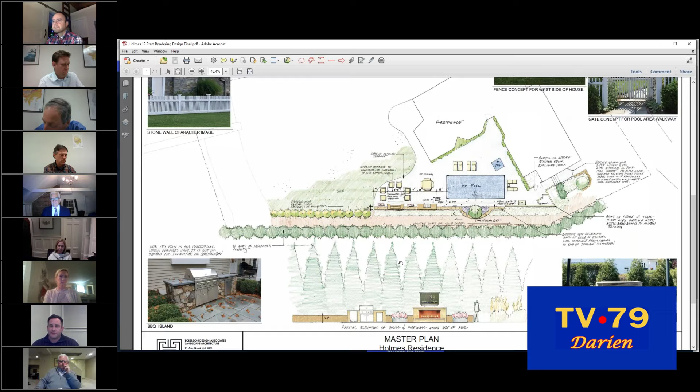So what we're proposing is a very simple application, basically a small extension of the existing patio. Here's the existing pool. There is a massive screening of tall evergreens between the adjacent neighbor and our client. What's being proposed is a very small, about 1'9" seating wall with a built-in grill, and a TV/fireplace wall where the TV can rise and lower out of the back, as seen in this picture. The wall itself for the TV and fireplace is about 3'10". The TV that comes out of it, if it's a 52-inch TV, is only about 2 feet tall, so with the TV and the wall it's not going to exceed 6 feet tall. The wall is located 8.5 feet off the property line, which is required to be 8 feet for the patio, so it complies with the setbacks. It is not a structure.

We have the TV and fire and everything facing away from the neighbor. It's facing towards my client's house. If my client really wanted to, he could put the TV on the side of the wall or side of the house and face it towards the neighbor. He hasn't done that. Everything, all the sound, all the light, all the noise is projecting away from the neighbor that shares a common property line.

As far as in response to DEP, yes, it's a stone wall, so it's going to have a footing, so it will be anchored. And understandably, if it does get flooded, that flood insurance would not cover that. That's completely understandable.

Again, thank you for having this special hearing tonight. That's really all our presentation is, because it's such a simple project. If you have any questions, I'm here to answer them.

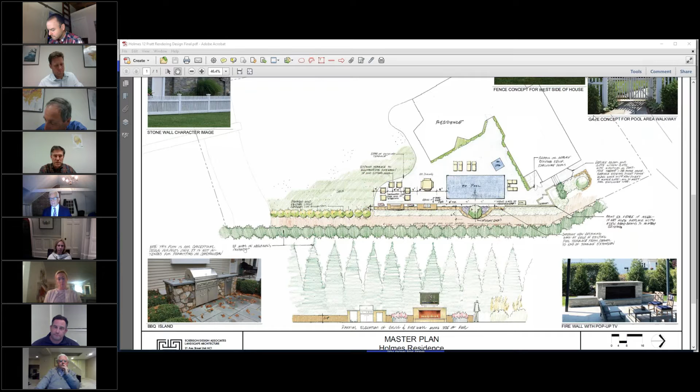Great, thank you, Rob. My first question is that one element that's in the middle, it looks like a table. I can't see what it's called in the middle. This here? No, next to it. That's a great, it's a square. Looks like a table, a wooden table. Oh, this here. Yes, yes. You got it. There's a table there now. They have a table here. They've got chairs. There's a standalone grill.

You know, really what we're just doing is making it nicer and a little more high end. Right, I got you. So my question is, on Google Maps you can see that table sitting there right now. From where the fire pit, from where the built-in grill starts to the end of the new wall, how many feet is that? What's the length of this whole thing? 14 plus 9, about 23 feet. It's only about 167 square feet of patio being added.

It's not very much. No, I'm starting with the wall. So the wall is 14 feet long. Is that what you said, or 28 feet long? Well, we're 7 feet from the grill to the firewall. Then it's about 8'6" that firewall, and then it's 7 feet to the end of the wall. So that's 14 plus, I think, let's call it 9 feet. So 23 feet. Okay, and does the wall start at the edge of the pool?

Because in Google Maps, you can't see the wall there. So the wall is starting at the edge of the existing patio. This patio is there, and that's just it. Basically, the wall is going to go on the edge of it.

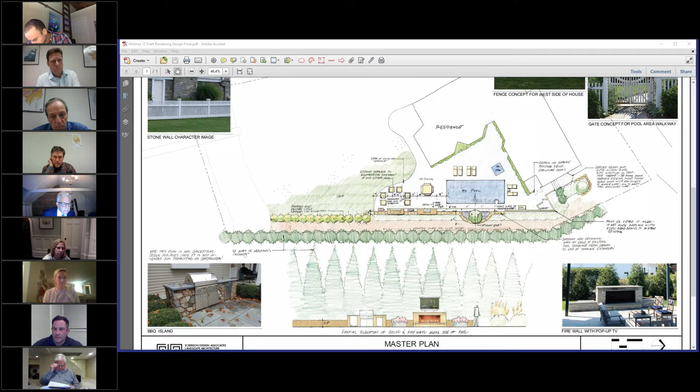Can you pull up that map again, Rob? I think it says from shower to end of existing. So is there a shower there on the property line? Way in the corner, there's a shower, that's the corner, Kara. Can you blow that up, Rob? Yeah, blow it up a little bit more. One more click. I got it, yeah, then shift it over. Now you got to slide it up a little bit. There you go, a little bit more. There you go, bingo. See that box at the bottom?

It says, just read that box to me. It says construct new retaining wall at edge of existing pool terrace from shower to end of terrace extension. Okay, now where's the shower? So here's the shower, that's an existing shower. Okay, so then to here is about where it's retaining. Once we get to here, it's at grade, existing. Because what's happening is we've got a little bit of a swale in here, and there's built up debris and stuff in here, so there's going to be a little bit of a drop. That's why we got the spot elevations out there. So in this case, it's a little retaining, but it's only about 3 feet. By the time we get to the grill and this area, it's no longer a retaining wall, it's at grade, so it's just a freestanding wall.

I got you, my question just was how many feet's the overall thing. What's that one box that's between where you are now and the shower? Oh, this area here? No, over - go from... no, there's a box going over the other way. Right there, that box, what's that thing say? STR, I don't know, can't read the handwriting. I mean, I think that's just like a table or something that's there. Probably just storage - STR, storage. So it's a box for storage, you can put stuff in there.

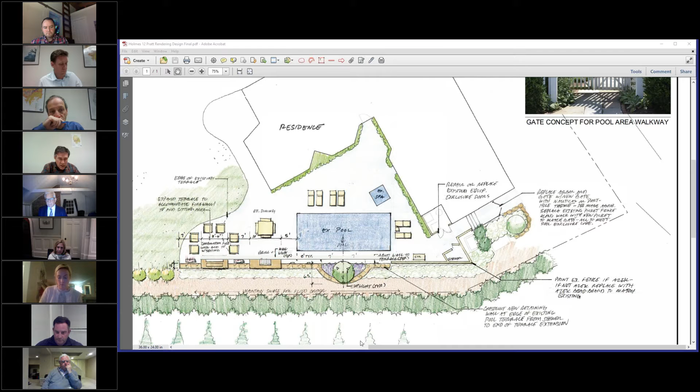Okay, and if you slide the thing down, Rob, you can see the height of the wall on the bottom scale. Hold on, my computer didn't like AutoCAD and GoToMeeting going on at the same time, so I had to turn that off. I'm amazed my computer doesn't melt down with all the graphics. Keep going—right there, see right there, there's a dimension next to the fridge. Keep up, that's it—1 foot 9 inches. Okay, that's how high that little seat wall is. And this is about 2 feet, 30.

So to me, their depth and width is the same exact thing, correct? Well, yeah, I just want to make sure I'm on the same page—front to back is depth in my mind. That's 30 inches for both of these structures that Rob is pointing out. And then the sitting wall is 18 inches high, 18 inches deep, and 21 inches—12 feet, I'm sorry, plus. So it's 18 inches deep, 21 inches high. That makes it a nice seating wall, which is fine, and my clients have no objection to it.

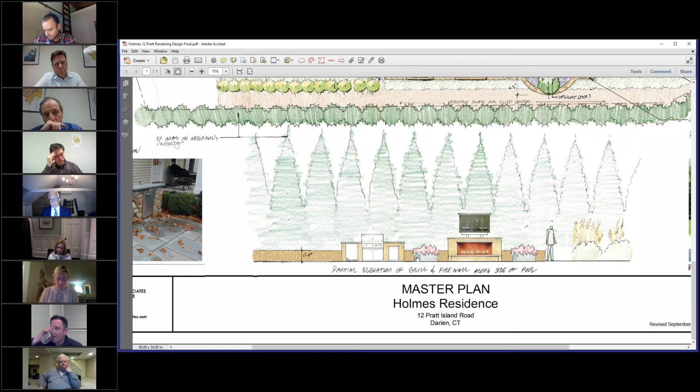And Kara, in response to your question, it is my understanding that David Keating has approved built-in kitchens as a wall and allowed them to be at the edge of terraces, 8 feet away from properties, in the past. So we are not challenging that. But when I talked to Dave about this particular application, he did not advise me that he approved anything but a kitchen. And I think this one is pushing the boundaries, because what you've got now is a fire pit that's not a pit down by the ground, but an elevated structure that's 4 feet tall. And that's this one.

And then it has a TV that pops out that gets it to 6 feet tall. And what's to prevent you—is that appropriate? And I think that's a structure.

It creates noise, light, and it's going to encourage people to congregate outside at night. My clients' kids' bedrooms are right adjacent to where this terrace is. They're 25 feet away. And now there is some screening, but the fact is that with an outdoor 24-hour TV, you're going to have Monday night football games going on till 11 o'clock outside in the warmer weather.

And the applicants already have the ability to move a TV outside if they want and put it back in, and we couldn't stop that. But the likelihood of that being year round, which this is, and it's just so much easier—this is really a structure in our view. And there's plenty of room on the property for them to put it elsewhere.

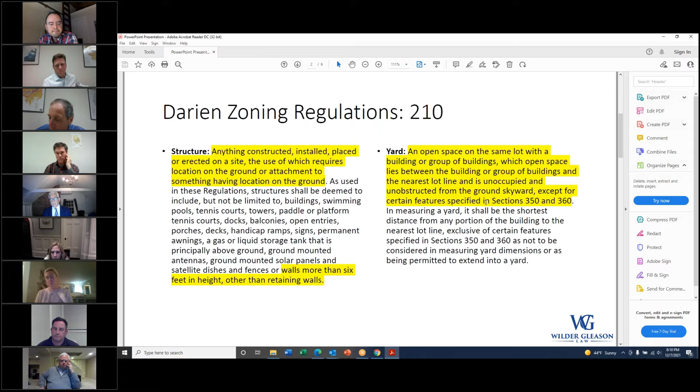So then the question is this structure—and we're not objecting to the kitchen because that's a ZEO interpretation already, and we're willing to accept that, but we don't want the fire pit and the TV coming out of it.

And so if you look at 361, it defines terraces, allowing a terrace shall not be considered in the determination of yards. It shall be unroofed and without walls or parapets or other forms of enclosure. Well, this is a form of enclosure, slightly. I mean, and also you're allowed to have an open guard railing, not over 3 feet high, adjacent to your terrace.

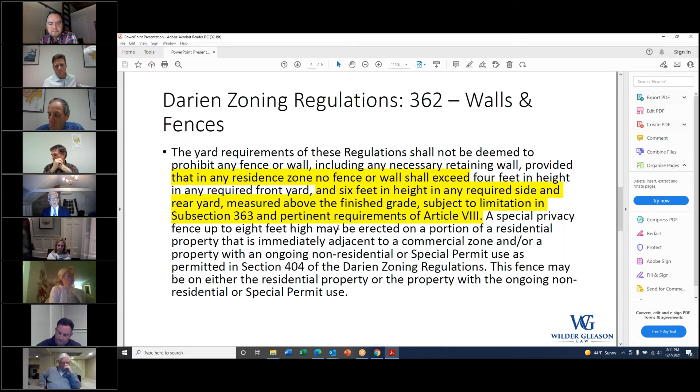This is a 4-foot wall that they're proposing, this fire pit. It's not an open guard railing. So I don't think your regulations allow this. The yard space is supposed to be open, and it's 25 feet here. You have a 40-foot rear yard.

And looking at the plan itself, which I'm going to blow up, because when you look at it, they could move this 25 feet away and put it back here. And we would have nothing to say about it. And we think that's appropriate.

To allow this to happen now, it's going to be the slippery slope. We are okay with kitchens, and I think the ZEO has approved that. But beyond that, you're entering slippery slope territory. Calling anything that's 30 inches deep, 4 feet high, and 8, 10, or 6 feet wide, whatever it is, a wall, and allowing a series of these to occur is only going to intensify the use adjacent to the property, which is contemplated by your regulations as being not permanent structures.

These are permanent structures. They're fixed to the ground. They're attached to the ground. They interfere with the open yard that is required. And this property is already challenged because it's in a 1 acre zone. It's a half acre.

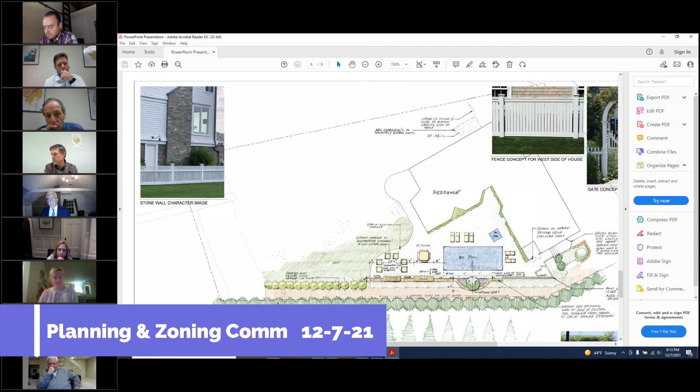The pool itself is there by a variance granted back in the 80s. And it was, in retrospect, almost improvident that it was granted, because exactly what's happening now is a consequence of the fact that the pool's there instead of back where it should be in compliance. And the tendency is to have everything around the pool, which puts all the activity adjacent to my client's property.

And interfering with his quiet enjoyment of his property. You're exacerbating that situation if you approve this TV and fire pit. I believe your regulations do not allow you to do that because this is a structure. It is affixed to the ground and it interferes with the open space between the property line and the 25-foot setback here.

And it has a negative impact. The kitchen is an area that's used for an hour or two and then it goes quiet. It's unusual for you to be doing that late at night. This fire pit and TV is going to be used late at night, and it's got kids' bedrooms right next to it, and it's not appropriate in our view.

I just want to ask one more question. Of course you can, sorry. So in looking at...

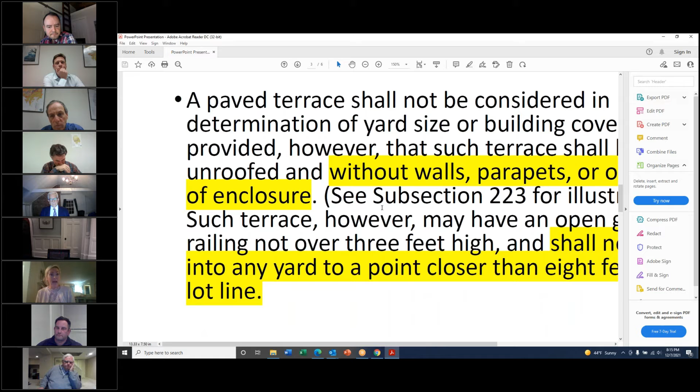From the plans, it appears at the planting area, which I believe is the retaining wall section, or maybe not — it's hard to tell because of the size of the font and writing, it's hard for me to see it all. But I think you said, Mr. Frangione, that was 2.9 feet. So does that extend the terrace, or is that wall not considered part of the terrace? Is that a different wall?

They're different walls. Yes, they may look connected, but by the time it gets over to the fire pit, it's no longer a retaining wall — it's a stone wall. From the perspective of the neighbor, it's a stone wall.

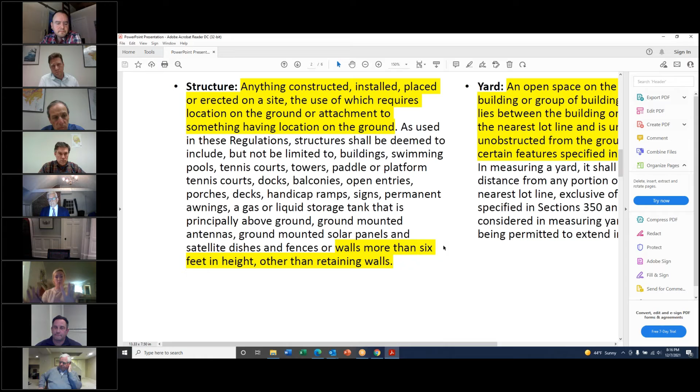But are walls that are less than 6 feet tall considered terraces? Is that not considered enclosing the terrace or the patio? No, and I was going to say in my comments, it's not a form of enclosure — if something's open on 3 sides, it's not enclosed. It's just a divider, no different than, in theory, putting a Jersey barrier there. It doesn't enclose it, it's just a fancy looking freestanding wall.

Is there a fence around the pool or property? There is a pool fence. I know that's required by code. Right, so where's... I know the fence, if I remember correctly, extends out all the way to the water, basically along the row of trees, because I did walk down there and I saw where the fence ends at the seawall.

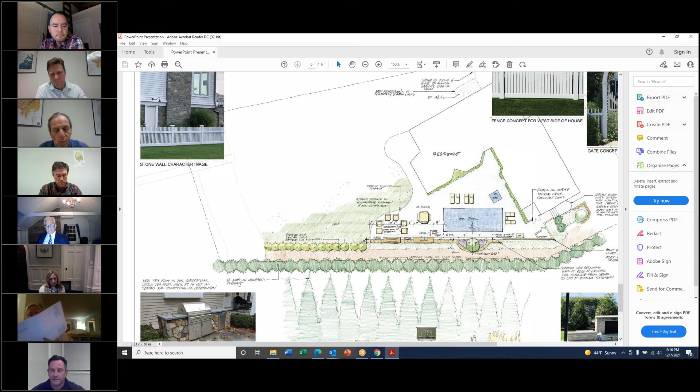Can I ask a question? Who's that? Adam? That's Adam. Go ahead, sir. Yeah, I've got a question.

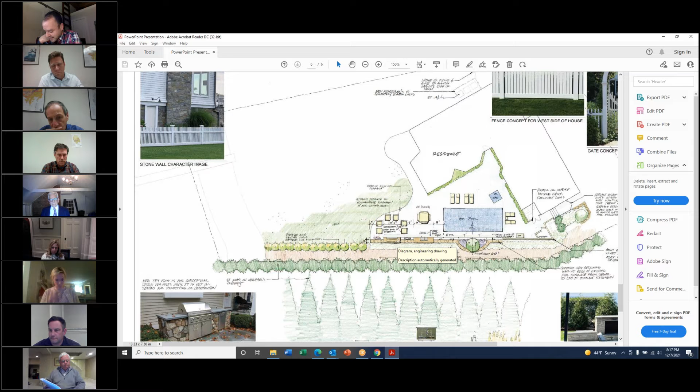You mentioned, just as it relates to the fire pit, the wall itself is going to be about 3 feet 10 inches, call it 4 feet, and the TV itself is going to be about 2 feet. But looking at the diagram underneath it, there's obviously some enclosure the TV has to sit in. So it's not just the top of the wall plus the TV mounted flush to it, right? It looks like there's some open space underneath it, and the TV's got to be protected from the elements somewhat. How big is that enclosure? Is that an extra foot, an extra 6 inches?

I don't know the answer to that, but we're kind of splitting hairs here. The freestanding wall is about 3'10". If I put a planter on it that's 36 inches tall, that doesn't all of a sudden make my wall 7 feet tall. If I take a freestanding TV and plop it on top of the wall, that doesn't make the wall... But is this a freestanding TV? No, it's a TV that can come in and out of the wall, so it would be part of the structure, part of the wall — unlike a planter, which is removable and not secured.

Okay, and a freestanding TV is not secured either. You could lag bolt it. I could take a TV stand and secure it to the wall. I'm just asking you based on that. It's no longer really semantics here.

No, a freestanding TV is not secured, and this is part of the structure and rises up. So it's one thing. So now, to my point, if I take a TV and I lag bolt it to the top of a wall, is that now a 7-foot wall? No, it's a wall with a TV on it. In this case, we have a wall that 98% of the time is just going to be a wall.

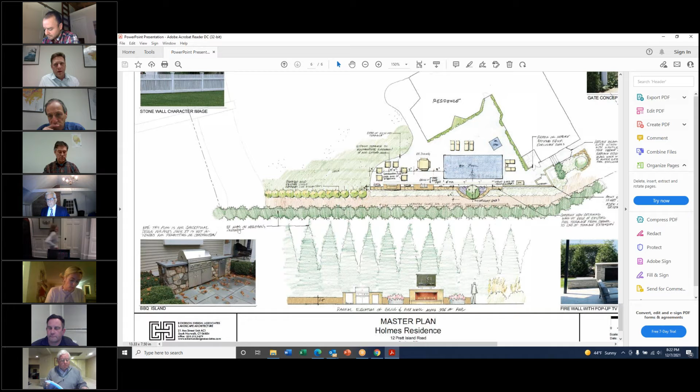And just very quickly, a fence is defined as a barrier of any material or combination of materials erected to enclose, separate, screen, or buffer areas of land. So I think that's an important distinction to make as the commission considers the difference between what might be interpreted as a wall versus what might be interpreted as a structure on the property.

Is a wall and fence in our regs defined as what you just read? Yes. Oh okay, that's very helpful. Thank you. And this is actually, whoever just put this up on the screen, that's exactly what I was going to talk to.

If you look, see where those chaise lounges are right there, Rob? That thing right there, above this chaise lounge, that to me looks like a gas grill. Is that probably correct, Wilder? Because you can't see. That's correct. We have a gas grill right there, and that's why we don't object to their gas grill.

So if you line up, if you look on the other thing, or if you go the Google Maps other way, the table that we were talking about earlier lines up directly with the end of your pool at your house, Wilder. Yep.

And then that gas grill is away from the house. So I don't mean to split hairs, but the fire pit's not a fire pit — that fire pit is a gas-fired fireplace. There's no smoke coming out the top of it, and it doesn't have a chimney.

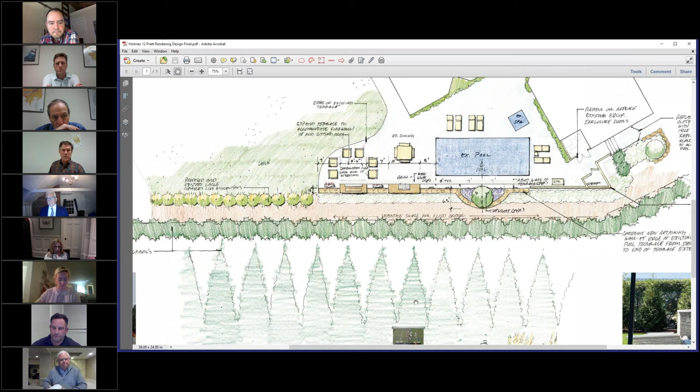Is there something in the regs that is relevant to whether kids' bedrooms are there? It's a pretty clear issue about setbacks — what's within a setback, what's not.